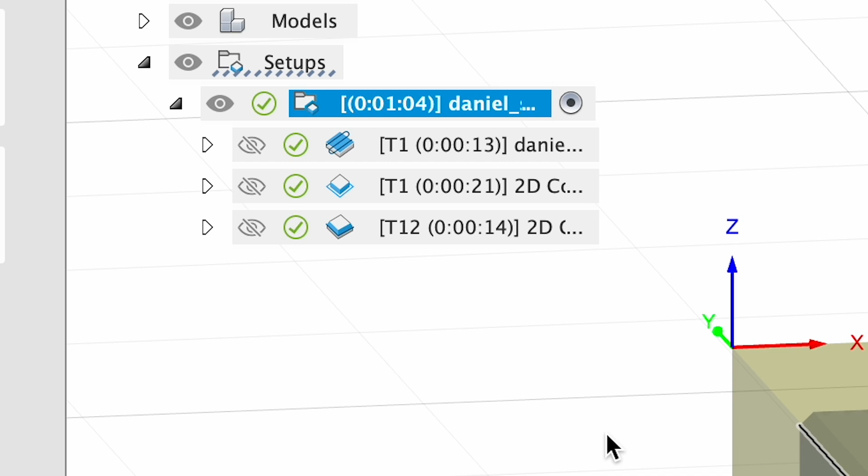Okay, let's take a moment to correct a small issue that's present in our setup. Look at our toolpaths. We've got 3 of them. The facing operation that skims off the top, then the 2D contour and the 2D chamfer. The issue is that we've already done one of these steps. We've already cut the metal off the top of our stock. So let's separate that step from the other 2.

Right-click on your setup and choose Duplicate, and then click once on your first setup, wait a second, and click again on the name to rename it, and call this one Face the Top, and rename your second setup 2D Contour the sides and Chamfer the top. And then delete your duplicate toolpaths such that your first setup only has the facing of the top, and your second setup only has the 2D Contour and the 2D Chamfer in it.

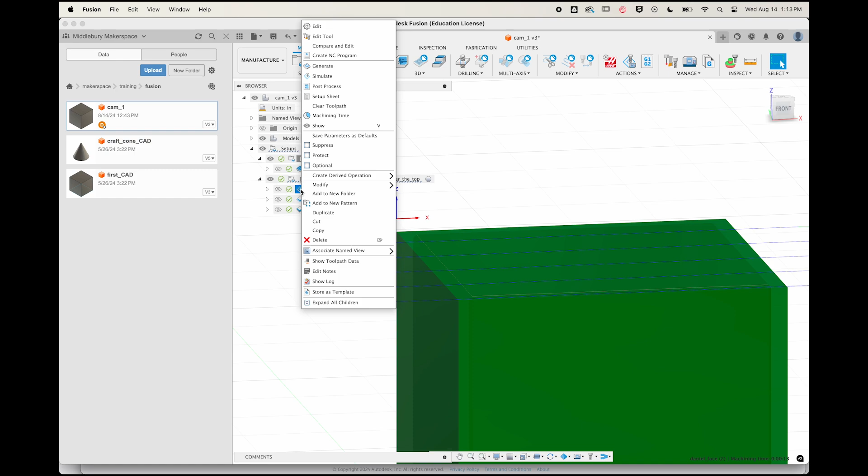Good. This better represents reality. First, we faced the top. Then we pulled material out of the mill to inspect it. Now we're going to put material back in the mill and contour the sides and chamfer the top. And this isn't just because we love being neat and tidy. It's necessary. Do you remember how we faced the top?

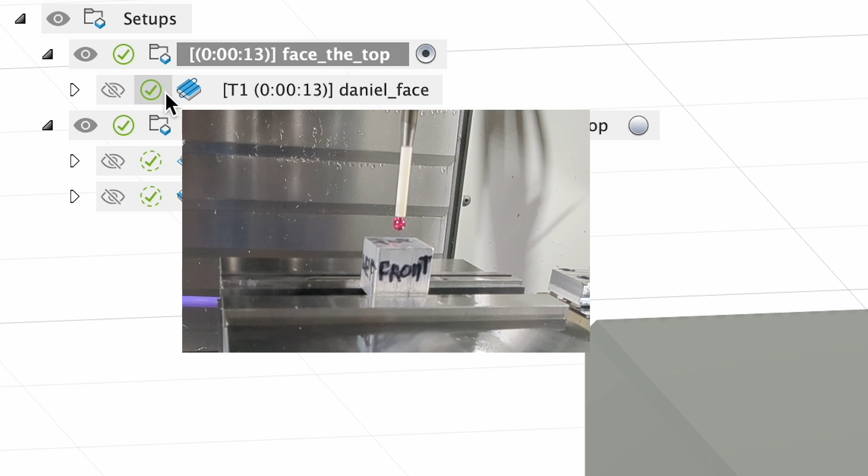Well, first we probed it. And what did we probe? We probed the top of our raw stock. And that material is gone. So we can't put this partially worked cube back in the mill expecting to probe the same surface. It doesn't exist anymore. We milled it away. But back in Fusion, we've got this problem. Our work coordinate system, this point right here, is positioned on our raw stock as though the metal were still there. This is what we get to fix by breaking our toolpaths into 2 different setups.

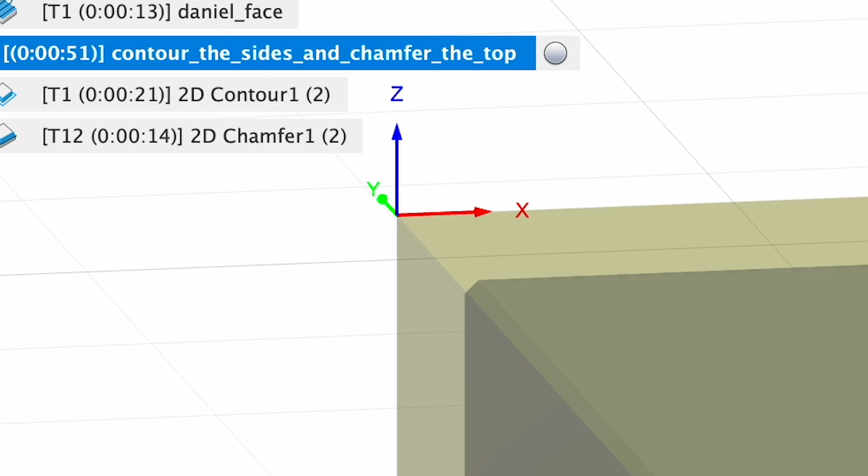So let's fix it. Double-click on your second setup to edit it, and click on the Stock tab, and look at this stock top offset. It used to be set at 40 thou, which represented our raw stock that we were going to cut away. We've done that already, so let's set it to 0.

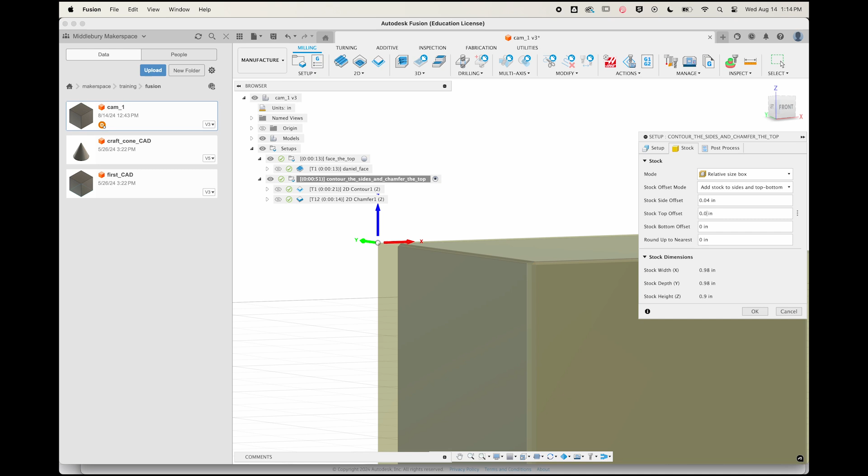And watch how when you set it to 0, our work coordinate system moves down 40 thou, down to the very top of our model, the clean, machined surface that we've already created, the surface that we can actually touch with the probe when we put this back in the mill. And if we simulate this second setup, we should see that it starts right at the 2D contour and then does the 2D chamfer, and it skips the facing operation.

Go ahead and click the post-process button for this setup, and let's change the name of the program from 1001 to 1002, the second thing that we're doing. Click the post button to generate your G-code, and look at how now our G-code has 2 tools, T1 and T12, and both of them get a Z-min value.

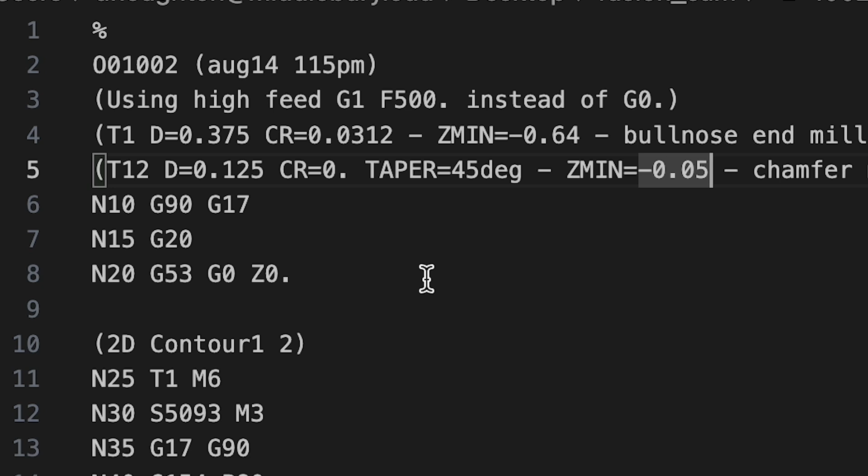So ask yourself the same question you did before. Am I comfortable descending from 0? And at this point, 0 is the top of your machined surface. That's what we're going to probe. Am I comfortable descending negative 0.64 inches for T1 and negative 0.05 inches? And you can ask that when you step up to the mill.

And notice how our toolpaths are recognizable, but they're not the friendliest names. So I want to go back and rename them. Let's call the first one Contour the Sides, and let's call the second one Chamfer the Top. Then repost that G-code, right-click on your setup, post-process. But notice how when I renamed this 1002, it didn't stick.

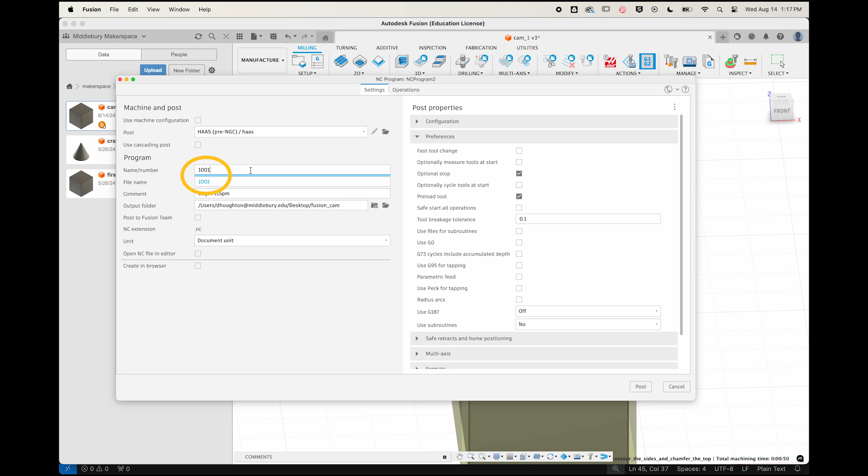So let's fix that. Cancel the post, double-click on your setup, and go to the post-process tab and change it here. This is a more permanent way to rename your G-code every time you post. There we go. Now this setup will always create a program called 1002. And if I hit the post button now and look at my G-code, I can clearly see each of my toolpaths, and I can see that they're mine.

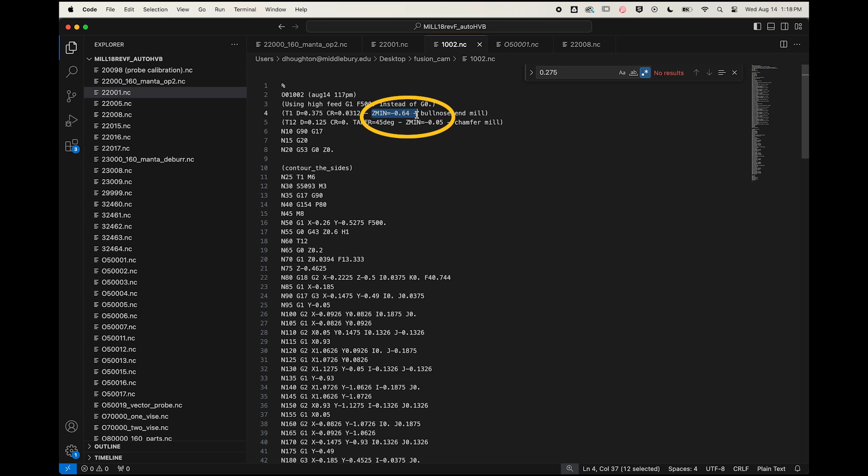And now that I've been around the block once of posting G-code, let's dig into it a tiny bit more. Look at my 2 Z-min values, negative 0.64 and negative 0.05. The more interesting one is the negative 0.64 because it's bigger, it's further down. It puts my vise and my mill more at risk. Let's find that location where we arrive at negative 0.64 down in our actual G-code.

For me, I'm using Visual Studio Code. It's a free and useful editor for looking at all sorts of programming code. If you've already got a text editor that you like, great, use that one. If you don't, go ahead and download Visual Studio Code so that you can follow along precisely.

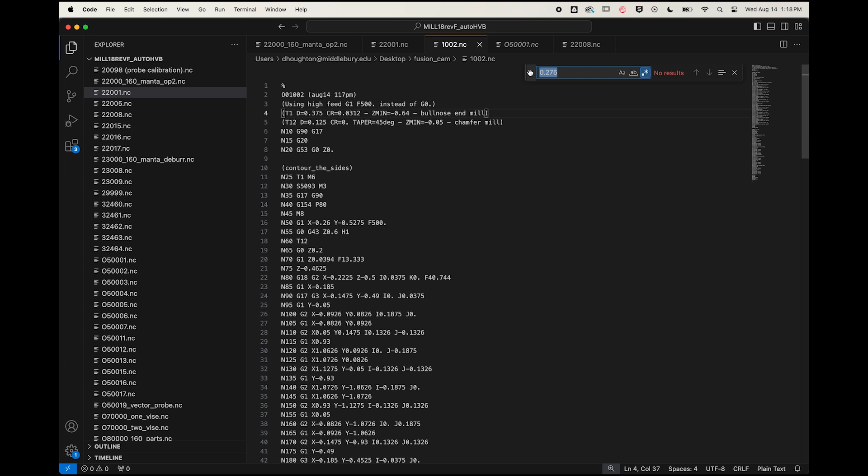All that I want to do at this point is search by hitting Command F for occurrences of Z followed by the minus symbol. Here, the first occurrence says Z minus 0.4625. This corresponds to this moment in the Fusion simulation where my tool is plunging down to its initial cut. The next occurrence is one line further down, right here at Z minus 0.5, just a little bit lower.

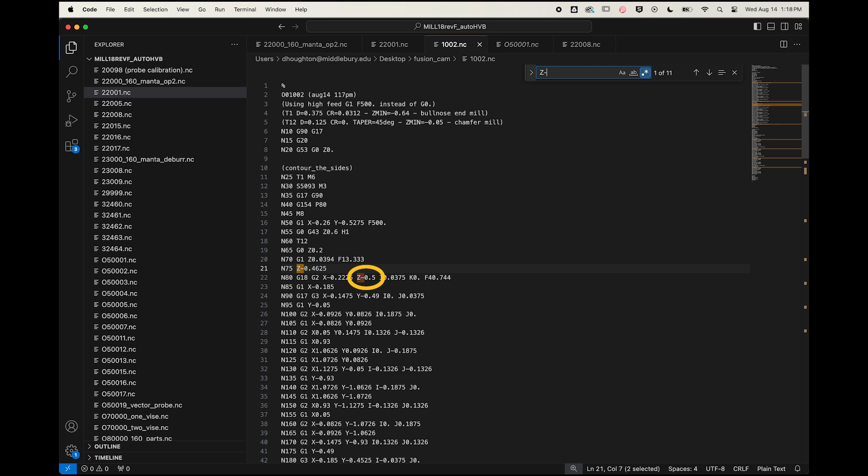Notice how this Z minus line is not all on its own. It's connected to a move on X, and you can see it here in Fusion, where we get a little lower and we get closer to our material as the tool moves to the right on X. And then there are many lines of G-code with no occurrences of the letter Z at all. This is where the tool is going around the 2D contour at the first of its multiple depths, half an inch down from 0.

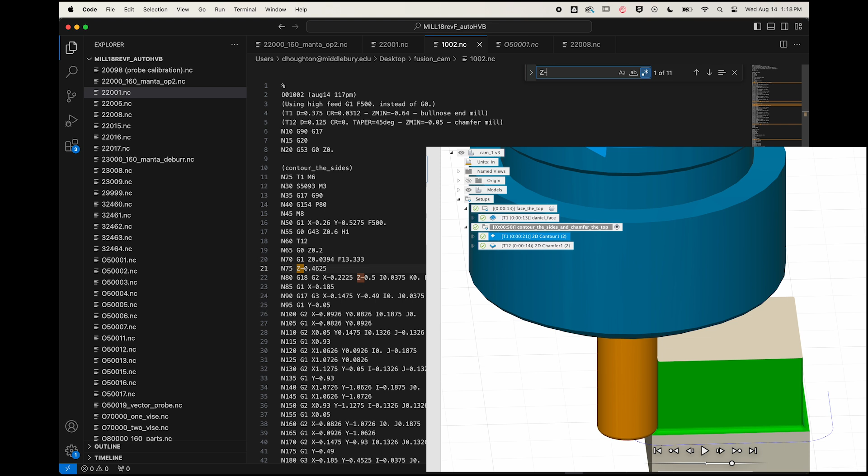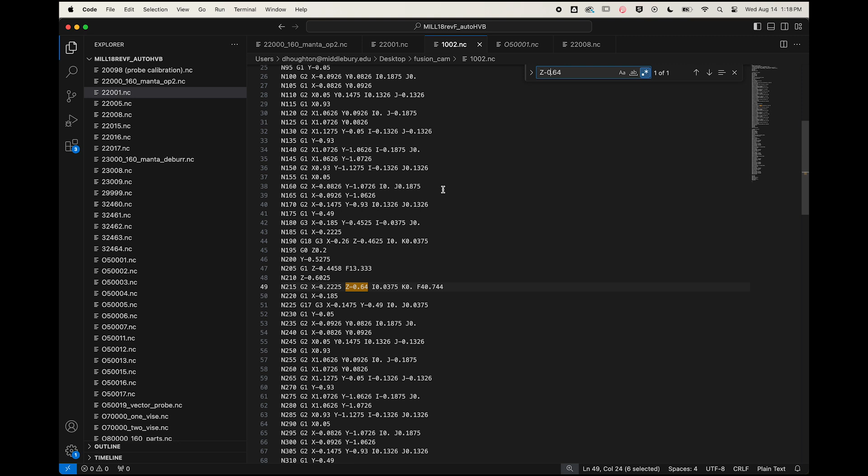If I modify my search so that it says Z minus 0.64, I'll find my way to the line of G-code where I descend to my Z min value. This corresponds to my second loop around the contour of my cube at the second of my multiple depths. I really like digging into G-code because I like understanding how each of these systems work.

If staring at this text code stirs terror in your heart, don't worry. We're really just trying to develop a strategic approach to not crashing the mill. You're trying to ask the question, how low am I going to go? And is there anything down there that I might crash into? You're trying to develop a sense of when you're past the area of elevated risk.

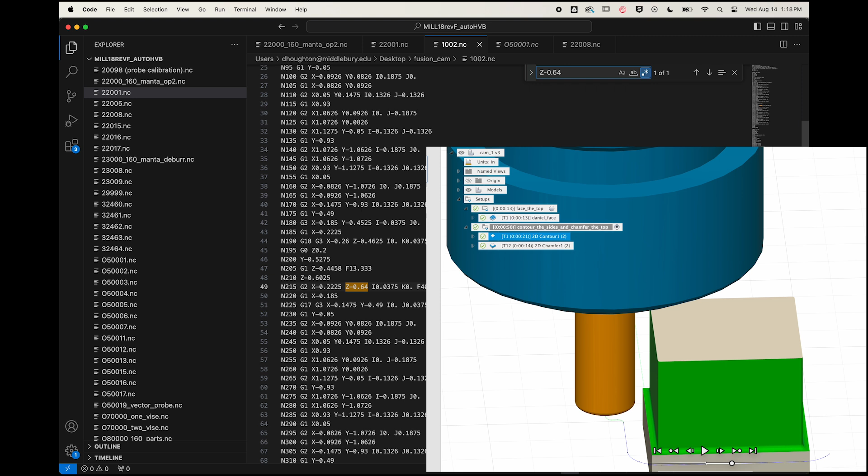Descending towards big, heavy metal objects is riskier than ascending away from them. Changing tools resets the risk game. Descending again with a new tool is risky. Ascending away is less so. As a beginner, it's probably going to feel like all risk all the time. That's a great mindset. That'll keep you going slow and hitting the feed hold button a lot.